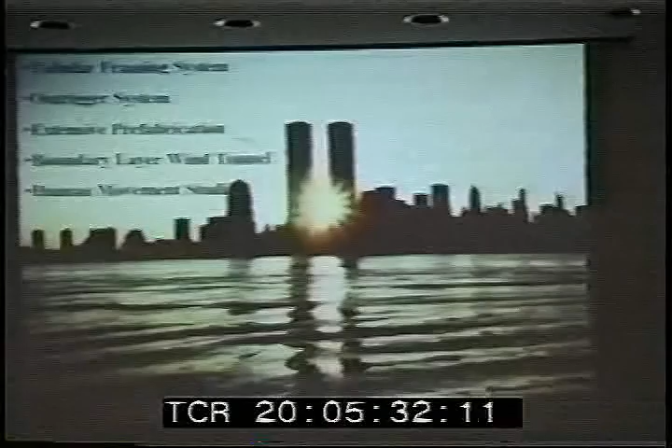I interviewed a lot of psychologists, and they said, what are you worried about? People ride in cars and ships and planes. A building's just another kind of motion, they'll accommodate. Well, the World Trade Center was a $1 billion project when it was constructed, so you don't invest $1 billion without being very sure. I went and rode motion simulators, and I have to tell you, if you ever get a chance to ride the motion simulators they use in the space industry, don't.

And then, in order to deal with the structure motion, we came up with the idea of a damping system. We looked at lots of different kinds, but eventually chose a viscoelastic damping system. We developed a theory for taking the statistical nature of the dynamic pressures from the wind on the glass as opposed to the statistical nature of the strength of glass and put them together to try to determine the breakage rate of glass itself in the building.

And in buildings at that time, all the walls inside the building were made of block masonry, and they leaked a lot, and they were very expensive to maintain. And so we developed again a theory for stack action. That's large buildings, kind of like a chimney. Cold air outside, the air rushes in at the bottom, rises up through the building, and goes out at the top. So we worked out a system that evaluated that so that we could design the support that we need for those pressures.

And then it was, I think, probably the first and maybe the last high-rise building or craft outside of the military and the atomic energy industry first designed to resist the impact of a jet aircraft. In this case, the 707 intercontinental version, which was the largest aircraft of its time. We thought it was lost in the fog headed toward JFK or elsewhere, similar to the Mitchell bomber that struck the Empire State Building.

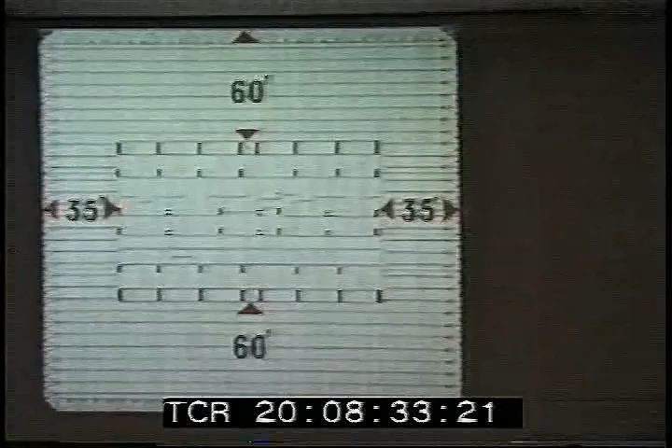So the structure has a 60-foot clear span on two sides and a 35-foot clear span on the other. And one thing to notice is that the columns in this direction are very long and hence very strong. They're box columns, very big box columns. And in this direction, there are lots more columns that you strike a line through, but they're, if you will, in a weak axis, so they're much less strong.

This is the computer that we used, or a tiny piece of it. Now, this washing machine down here was one of the five disk drives that we had. Each one had like a long playing record, except it had seven, I think, records inside. This is called the IBM 1620. It was their first solid-state medium-scale computer. We called it CADET, which meant can't add, didn't even try, because it added 4 plus 7 by looking it up in a table.

So this is the site. It was the site of what was called the electronics industry. Electronics meant vacuum tube. So if you had a radio, it was a vacuum tube radio, and you went down here to get the real cheap stuff. And a lot of controversy over moving all these businesses out of that space. A lot of controversy. But they were well compensated for it, of course, but I don't think you can really ever get compensated when you're upended.

And this whole district disappeared out of New York. There was no replacement for it. So there was no place you could go. Instead, there was a store here and one over there and someplace else.

Now, we surmised, we didn't know, but we surmised that in the wind, if the wind blows, say, in this direction, that the building would lean more or less downwind, not directly downwind, but more or less downwind, and then would oscillate about someplace. This came from experience that I had in working on offshore structures. I knew that that was kind of what they did, and I thought, well, a high-rise building might just do the same thing. You have to understand the dynamics of high-rise buildings in the wind did not exist as a subject at that time.

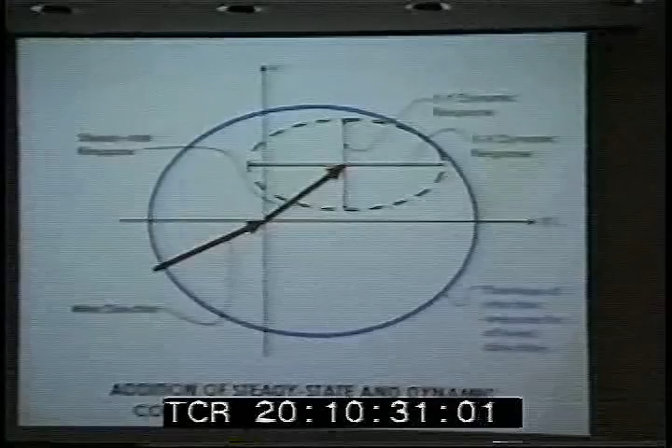But this is a view of Lower Manhattan, and you can see that the wind coming from the south headed up towards the northwest goes over all these high-rise buildings. It becomes very turbulent, whereas the wind which is coming from this direction is over the water. It's very smooth. And so we designed for these two circumstances using this wonderful idea of Jensen and Franck.

And here you see the wind tunnel model. And remember, this is a $1 billion project. So put a big tower on top of this building, the telephone company building, put an anemometer on it, another anemometer on top of this spire, and down on another tower on top of the Downtown Athletic Club. And we measured in the full scale the turbulence of the wind over the city.

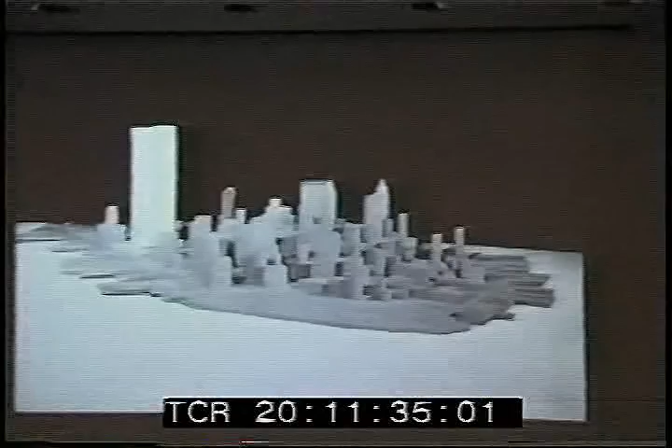And then we replicated it in the wind tunnel. And sure enough, it replicated. So it gave us a lot of confidence that where we were going was kind of sensible. Remember, it's $1 billion, and I was 34 years old. So here you see an example. This was an anemometer which was on the telephone company building, now called the Verizon building. And you can see it, an anemometer on top of that spire.

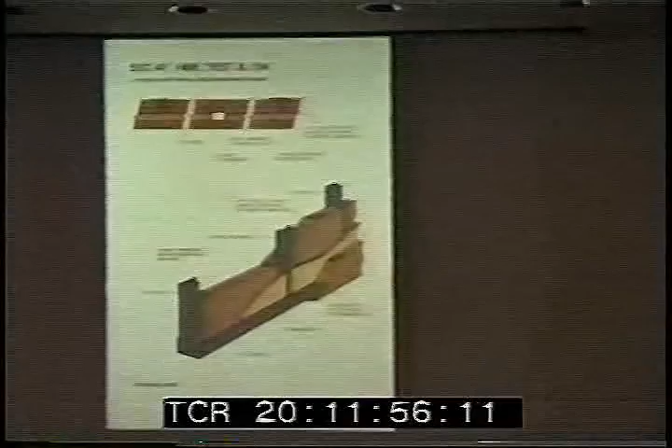The shaft wall partition system was wonderful because it was designed specifically to allow the structure to move without restraining it, and allowed the structure to move and still stay airtight. And I arrived at the idea because I rode on top of a lot of elevators in New York City, and went through all the buildings I could. Remember, the tallest building I'd worked on was 22 stories, so I thought maybe people who'd worked in New York might know something more that I didn't know, which for sure they did.

So I decided that partitions, the basic partition system, were terrible, and sat down and came up with this concept, which was then developed by U.S. Gypsum.

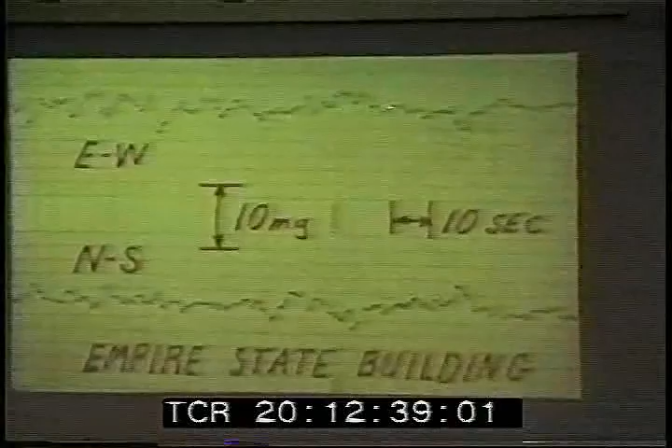We did a complete structural analysis of the Empire State Building. This is a trace taken off of accelerometers on the building. You see it's almost random. No kind of neat oscillation can be found there. The only way you can come up with a period of vibration is to drop all these data into a computer and analyze it, and it tells you that it's around 10 seconds, but you can't measure it out here. So, hey, that's a 10-second period building? No way. So, entirely different.

And what was it about the building? The Empire State Building was designed for no wind load at all for the first 100 feet, and then 20 pounds a square foot above that. And we were designing the World Trade Center for something in excess of 100 pounds a square foot. So you'd think that the Empire State Building would have collapsed, or we were wrong.

But we did a structural analysis of the Empire State Building frame, and we could, of course, develop the stiffness of the frame, so we knew just how it would deflect under a given lateral load. And then by putting this kind of data from accelerometers and knowing the density, it's possible to experimentally determine the stiffness of the building. And we found that the difference was a factor of 5. That is, the building was 5 times stiffer than the steel frame. And all that came from the infill action of the masonry of the building, and we were designing a building without any masonry.

The Trade Center trace looks something like this. You see it's a really neat oscillator.

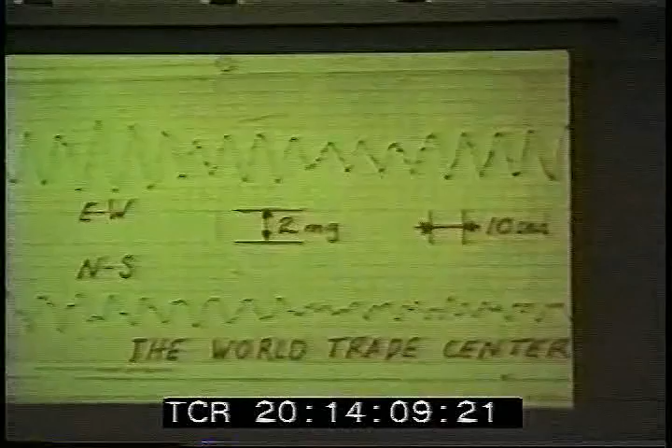And then the motion simulators, all kinds. We built one which is a pendulum. This is the first one. Now, motion in a high-rise building is not a good subject, particularly since no one had ever worried about it before. So we went as far away from New York as possible, to a little town in Oregon, and built this simulator.

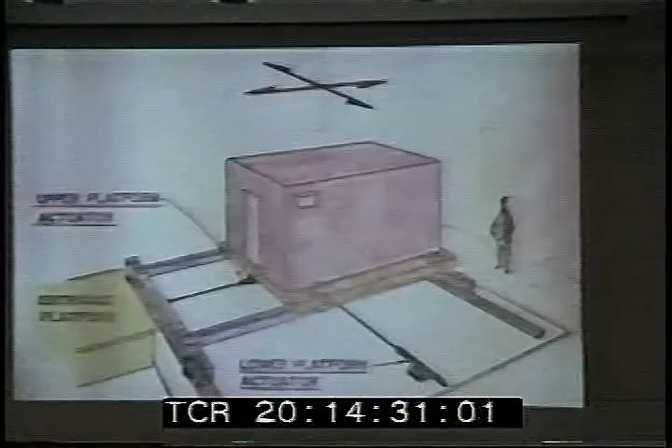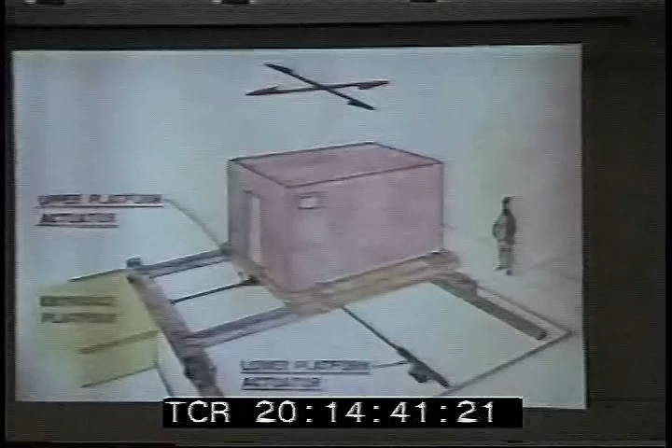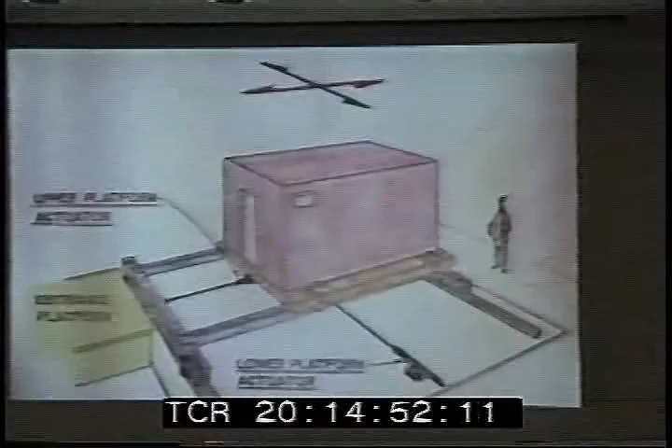And tested people who had no idea what was going on. It was very carefully disguised, so you went into the simulator without seeing any of this junk. You walked from a very nice little office into the simulator. We tested people who had no idea what was going on, gave a little eye test, and then we would start the platform moving and wait to see what happens. We had other people who were told that it was a motion experiment. Some people we retested, we had tested months before.

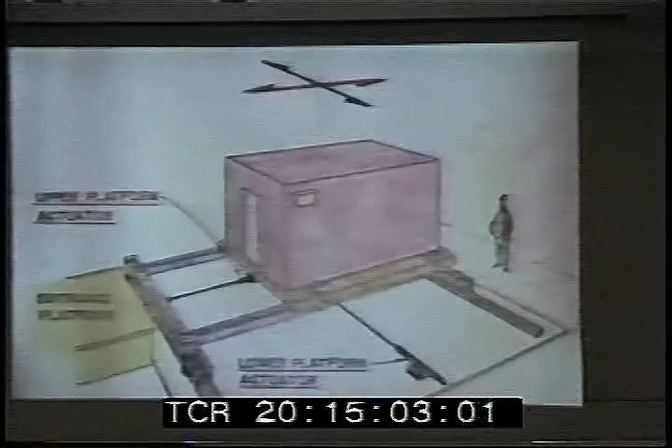We had one man who was told nothing, and you have to understand, it's a little town in Oregon, and buildings do not move in little towns of Oregon. They just don't do that. He was actually holding onto the walls. He would not respond to the fact that there was a problem. He was holding onto the walls, people falling over, because we could get this thing really moving.

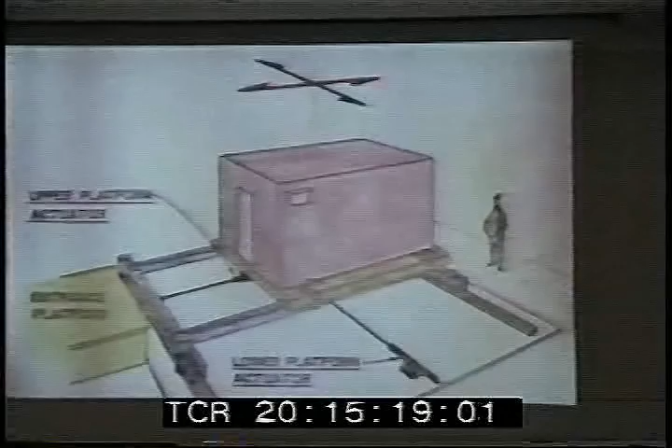Am I speaking loudly enough? In the back? Yes. Okay. Thank you.

But anyway, we tested lots and lots of panes of glass to find out how strong it really was, and also to determine what kind of glass to use. And ultimately, a semi-tempered glass went into the project. And interestingly enough, about half the breakage of the glass has been due to bullets. That is, people from far away get a rifle out and they lob bullets for fun, I guess. And at the lobby level, one guy was going by in a pickup truck, and he had a slingshot with 1-inch diameter steel balls, and he would shoot it at the glass, and each time he was successful in breaking one, it was $15,000.

So here you see prefabrication. This is the bottom of the piece, and this is the top. So these are big, big panels. These were prefabricated, and the pieces that go on top of that one. The floor system was prefabricated. Everything was prefabricated.

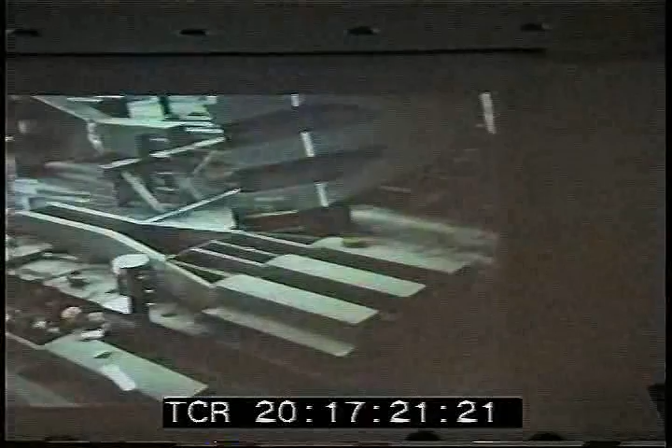Here you see fabrication. The length and width, the grade of steel, the welding that went into it, everything was provided to the contractor in a punch card format. Those of you who are very ancient like me know what a punch card is. It's about so big, it's got lots of funny little holes in it, and from that you can read data. I don't know when they stopped using them, but probably before you were born.

Still using it for loading. Oh, I guess that's true. Yeah. Well, we still use FM tape recorders too, but you know, I don't know.

Here you see some of those panels coming to the site, ready to be erected in the project. So it was an enormous logistics operation.

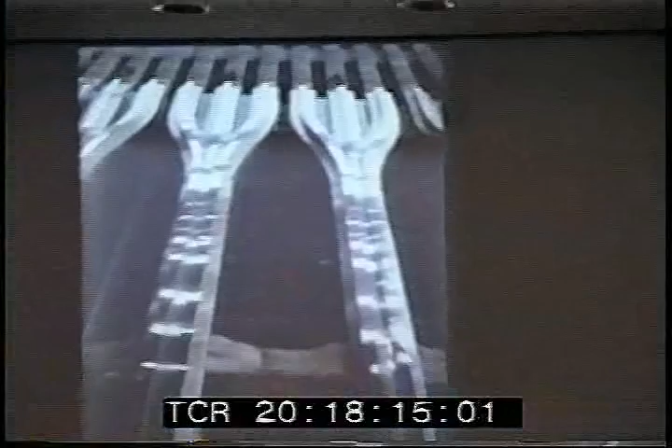So that panel we were talking about was spliced here. This was also prefabricated. When these aluminum panels were being put up, it was February, and the workers said, hey, you know, these things are split, they're cracked. Now, steel was pretty much topped out, and if you don't think having split connections at the bottom is an interesting subject, it was, of course. So we pushed the panic button and decided that the problem came from water inside and freezing.

And again, we went as far from New York as possible. Actually, we went to Berkeley, hired two esteemed professors who produced a report, which took them a month and a half to do, that agreed that it was a freezing problem. In the meantime, we had to fix them all, of course, because you can't wait around for reports.

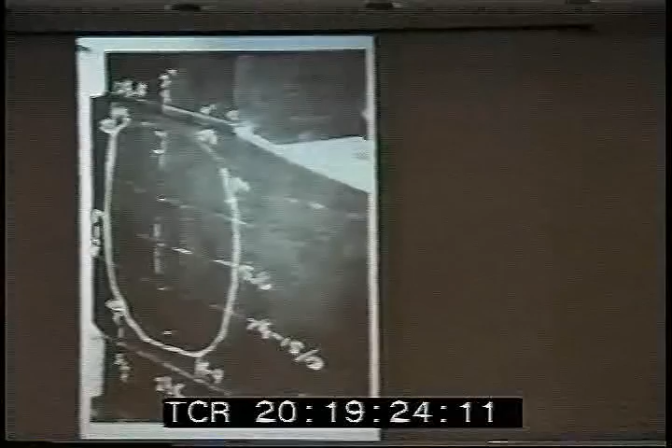This is sort of the standard piece. You see this bulge. Now, our client, the Port Authority of New York and New Jersey, was a fantastic client, absolutely incredible client. They never said no on any subject. Well, they could be a little tough sometimes. But this is one instance when they overrode our judgment, and that is they put the control of water inside of the structure in the hands of the contractor. And our policy is seal plates on all box sections so that you cannot get water inside for this very reason.

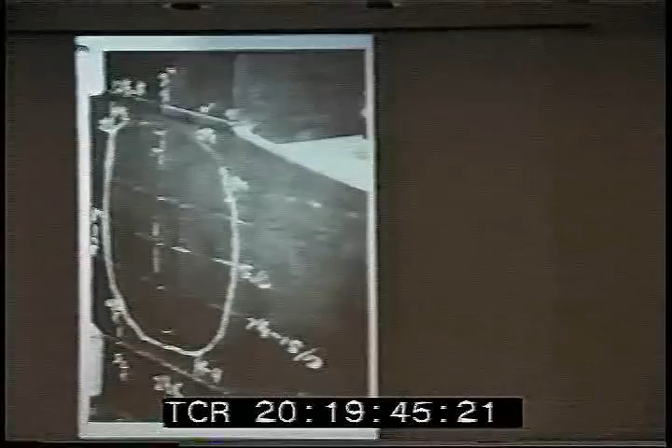Indeed, that night, some 85 box columns broke on the split on the adjacent small buildings that were under construction. These box columns were used for everything. If you had a hose with water running out of it, you didn't put it down. You just put it in the box column because then it didn't get people wet below. So there was water everywhere. We took out of some of these columns 600 gallons of water.

And then, billion-dollar project, let's not forget. After it was all done, we got a completely new team, went down, looked for water, and found it. So, very big problem with water inside of column structures. But anyway, we got rid of all of it. It's a prefabricated wall panel. There were thousands of these manufactured.

And the steel, all the steel plate came from Japan, so punch cards. No way to send them across except by airplane. Today we wouldn't bother, but this plate and this plate and so forth, all of these were fabricated in Japan. In the United States, the steel industry was in the mood of, well, this is what we make, how can you use it? In Japan, it was, what is it that we could make that you could use? And so we bought steel for the project in increments of 5 ksi, which is fantastic, of course, for the overall toughness of the building, really fantastic. So we didn't have over-yield material in the project.

These were fabricated in the state of Washington. And this is a readout of punch cards. Now, the Port Authority Legal Department said, okay, well, this is the basis of the contract. And we said, no, it's got to be the punch card. No, they said it had to be this one. And of course, the legal department won. But ultimately the contractors came back and said, hey, we saved all this data and we want it in the punch cards, and we don't want to use these at all. We just want to have the cards. That should be the basis of the contract. And ultimately, the legal department relented.

They were assembled something like this: a spandrel plate, a big broad plate, and the interface of the column plate was butt welded together. And then this, shown in blue, another assembly with the stiffener plate inside, was then added to it, and the outside web plate was added last. Notice that there's no weld between the stiffener and the outside web plate.

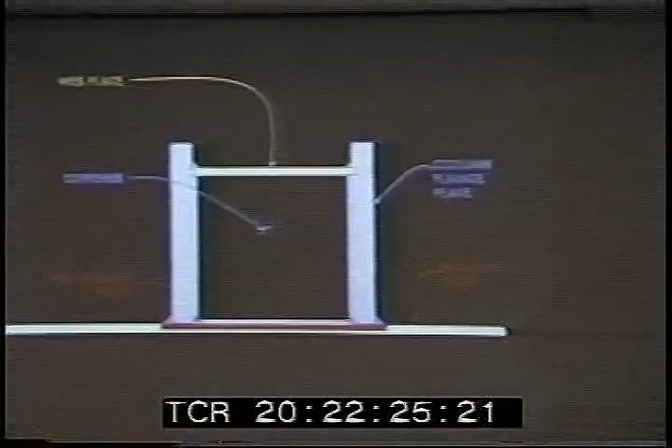Today, it'd be just like that. I mean, you pop this into your favorite finite element program, and out would come an answer. But at that time, that technology was not available, and so we did most of the finite element work based on very big programs, but not suitable for actual practical work. So we did a lot of finite element work on the World Trade Center. This kind of example also is the physical testing, of course.

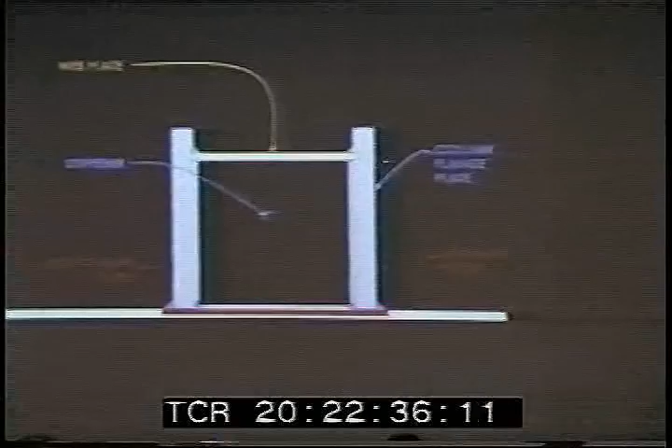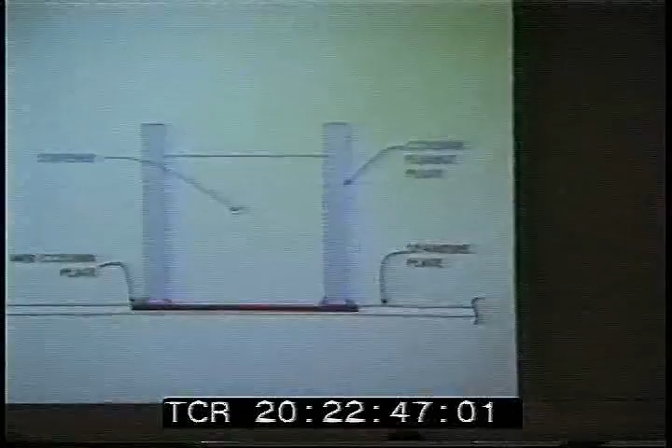So the way it was put together, like this: first the bed sheet as well as the flat plate, then the stiffener and the flange plate, and finally the web plate on top. And it was done with such precision that it was possible to maintain a very tight tolerance between the architectural work and the structural work. Normally we would allow in here about 2 inches, that is 4 inches at the very least. But since our columns were 14 inches, that 4 inches was a big number.

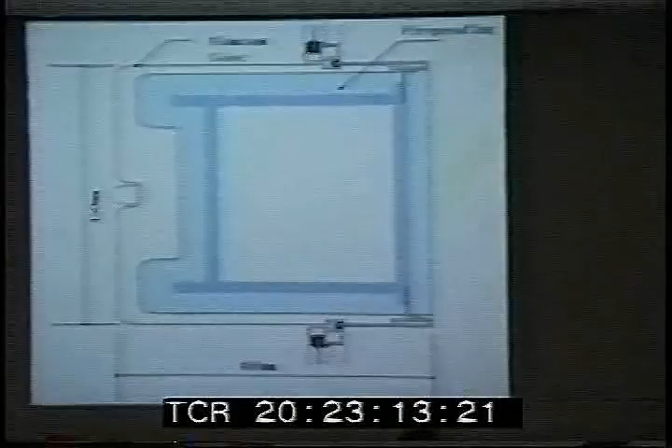Here you see the fabrication. This is that sort of bed sheet, fabricated first. It was, in my experience, the first time that steel fabrication was done with the material moving by the workman rather than a workman going to the steelwork, i.e. leaning back on the technology, I guess, first popularized by Henry Ford.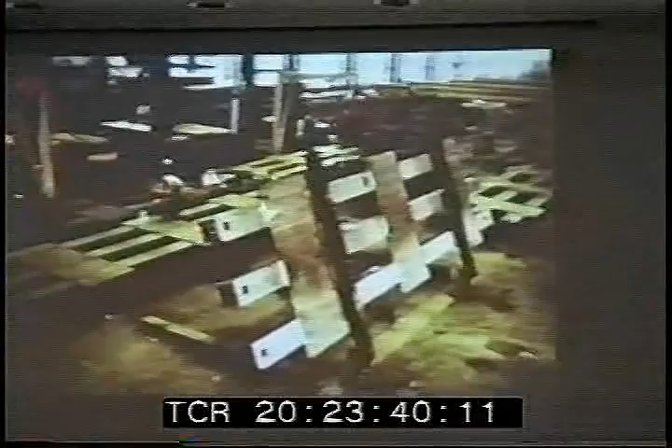Then assembled into big panels. Then these went into a jig, and the ends of the 3 columns were all milled in the jig without moving it. All the bolt holes were drilled in the panel, again without moving it. So we were able to maintain very, very tight tolerance of these panels. And it went together sort of like a Lego set. It was fantastic. They just went up, no problem.

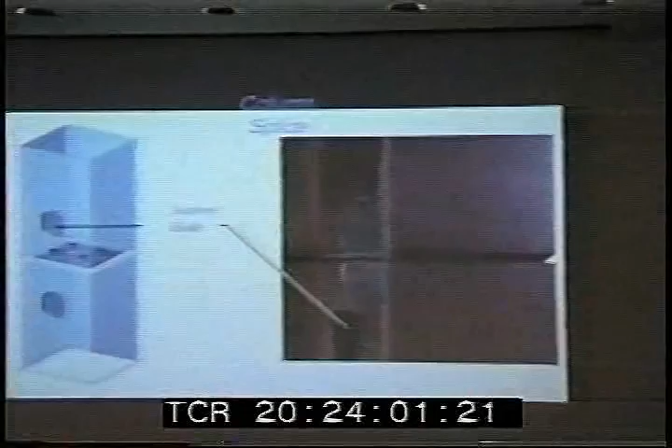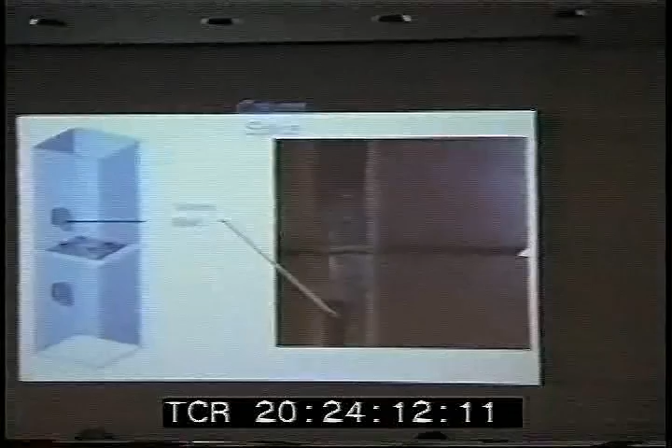Put them together, there were 2 holes, a large hole at the bottom of the column and a smaller one at the top of the column. Basically put the impact wrench for tensioning the bolts right inside the column and tension the bolts.

...center. So they asked that we maintain big openings. So this is a large opening, and then diagonally across the building, this way, sorry, there's another opening just like it. And then go down the side, you have this one. So the openings are diagonally opposite each other like this, so that at no one level do they cross the complete building. But they were never used. Great idea, like a lot of great ideas, didn't find fruition.

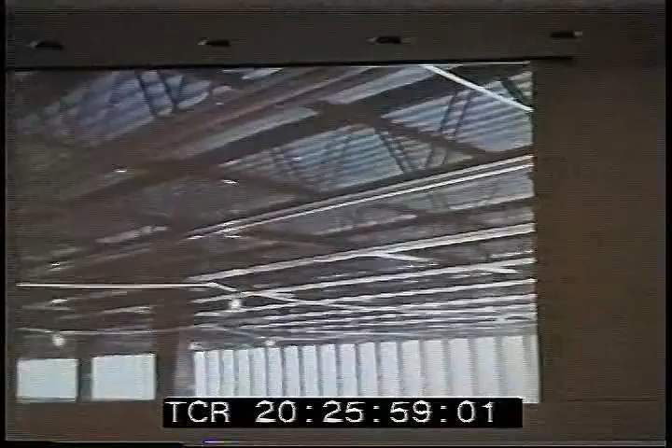So here you see something about the whole assembly. The prefabricated wall panel, prefabricated floor panels, and so forth. Not shown are the dampers because they were put in later. The floor system, there's been a lot of stress about the floor system being very vulnerable to all sorts of things. But in fact, it was designed so that you could remove, depending upon where you were, 2, 3, 4, 5, sometimes 8 of these trusses, and the whole system remained stable. With a grillage, as you can see here, a grillage of trusses, not just a one-way system. Very, very sturdy system.